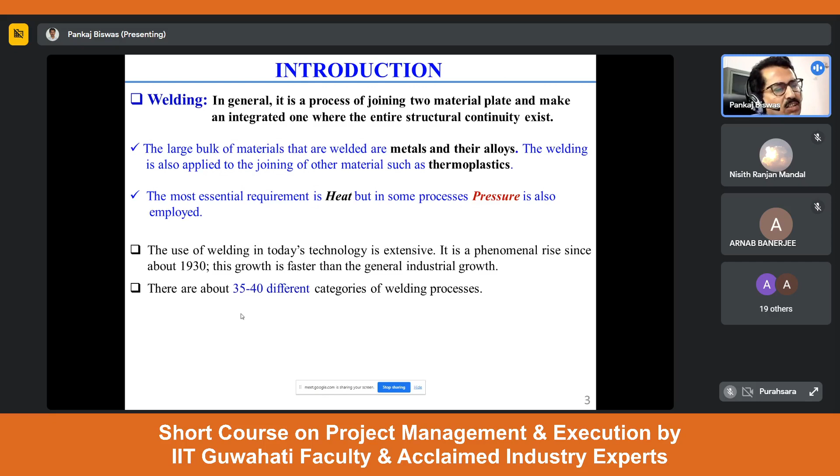After that, I will discuss the rest of the things successively. So, welding management in industry - to achieve the goal of a welding project, generally the following points need to be considered. For proper completion of any project, we should consider that completion should be within allocated time, expenditure should be within the budget, and we should maintain the quality standard.

Welding management is nowadays gaining attention globally, because this welding technology has demand in outsourcing as well as in boosting welding related manufacturing abroad. If there is a lack of management, your welding project limits the innovativeness as well as competitiveness among other industries. That's why proper management of welding related projects is essential.

How it is, I will discuss in today's lecture. First, I will discuss the different aspects required to complete a welding oriented project successively - that fundamental thing first I will discuss. After that, I will discuss a little bit about the management oriented thing.

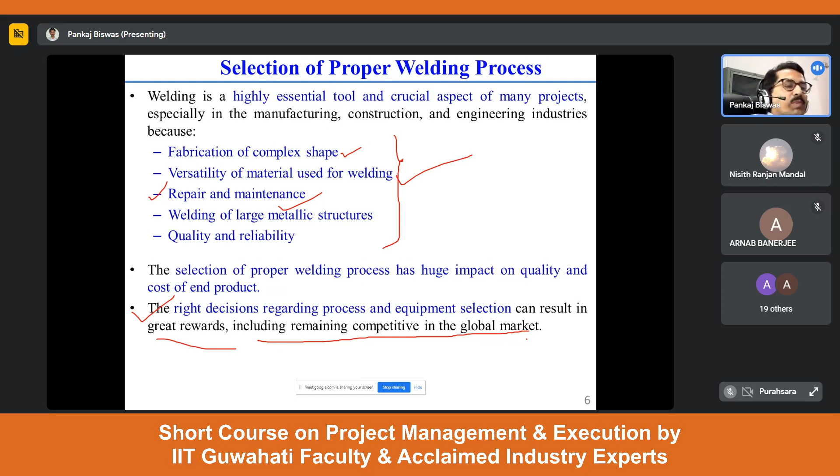So here I am showing, first I'll discuss a little about the different types of welding processes, and what types of welding processes are used for what types of purposes. Welding has different categories. I have already told you about 35-40 different categories of welding process are there.

These welding processes are grouped depending upon how the heat is generated, whether in some welding processes pressure is required or not. This welding is classified depending on its source of heat, it is categorized depending upon its pressure, and it is categorized depending upon its phases of base and filler material - phases meaning whether it is solid state, liquid state, or solid-liquid state.

Depending upon the composition of the joint - whether it is autogeneous, heterogeneous, or homogeneous - welding is also categorized. Depending upon the position, generally the position of the electrode, welding is categorized. And depending upon the mechanism - whether it is automatic, semi-automatic, or manual - welding process is categorized.

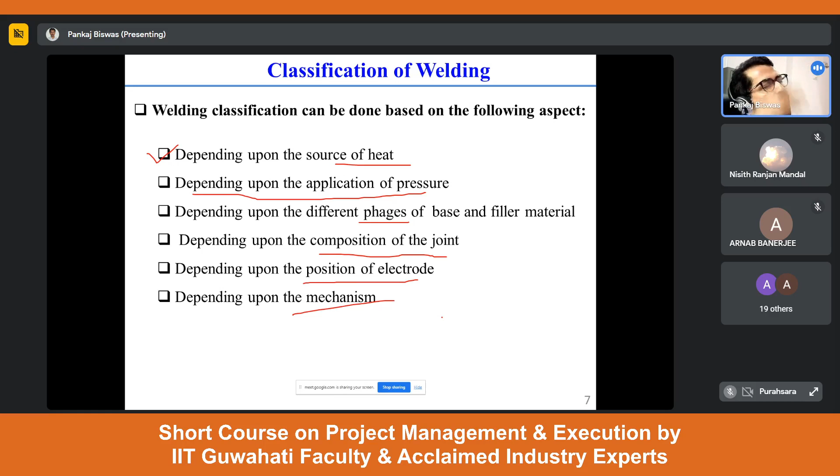Now you should have a detailed idea on this, then you can choose the correct welding process for the correct project. So let me show just one of the categories - this is depending upon the source of heat, how we can categorize the welding process.

Like arc welding process, here the source of heat is welding arc, that means electric arc. So many different categories of welding process are there, like some source of heat in case of welding as gas - so many categories are there. Similarly resistance heating, thermochemical welding processes, mechanical energy welding processes, and some other advanced welding processes generally considered radiant energy welding processes like electron beam, laser beam. These are the different categories of welding process.

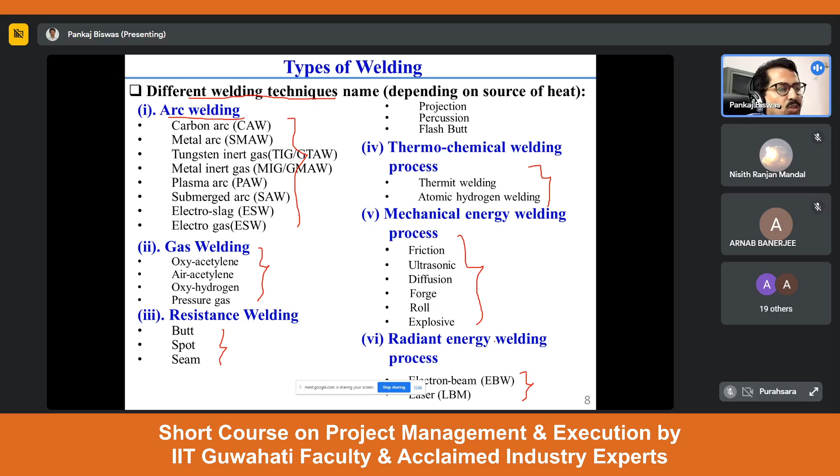Now, for what types of applications you should use what types of welding process, I am just briefing here. I am not going into detail on all these things, because if I discuss all these things it would take, as I've told you, one lecture for each welding technique. So I am just briefing this thing, giving you some fundamental ideas so that you can immediately get an idea of what type of welding process you should use for a particular part.

The selection of a welding process depends on the number of components to be fabricated, what is the capital equipment cost generally considered for that project, what should be the joint location, what is the structural mass, and what is the desired performance of the product. Depending upon these things, you can use your welding technology for a specific type of purpose.

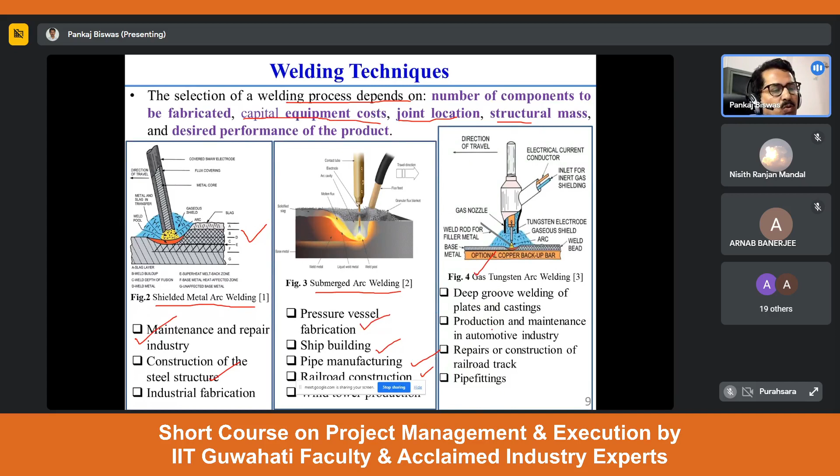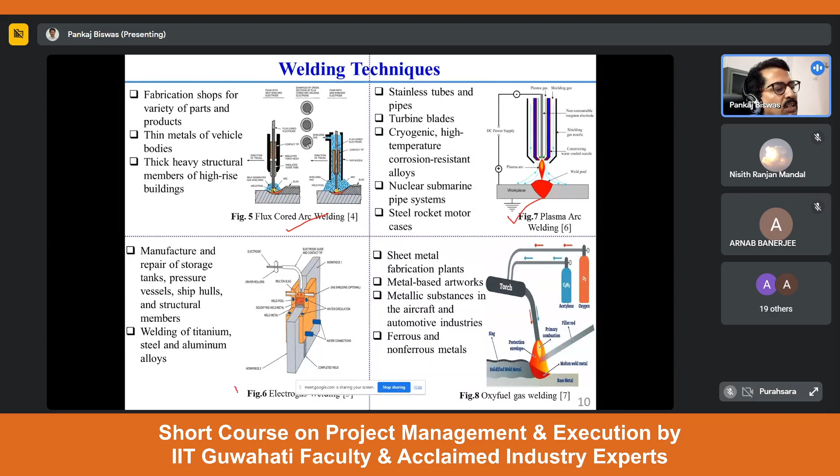Here I have shown the gas tungsten arc welding process. So seeing the quality of work, you can immediately say what should be the welding process for that purpose. I have grouped all these welding processes in that way, like the flux cored arc welding process. Here you see plasma arc welding, electroslag, electrogas, oxyfuel welding process, where you should use all these things.

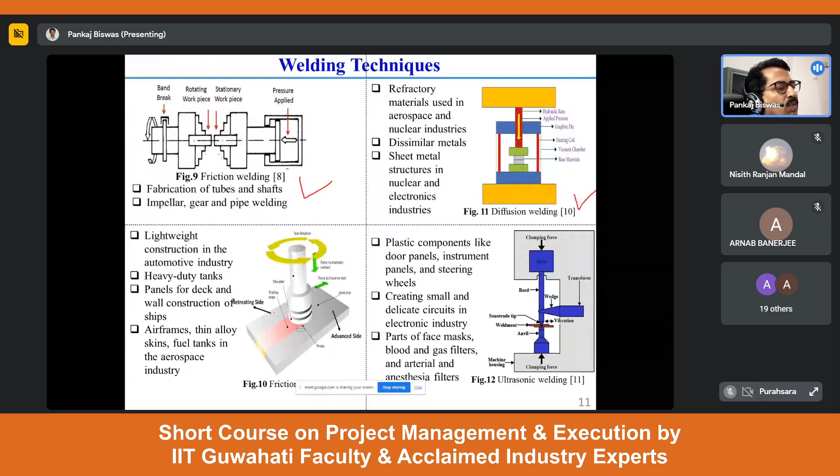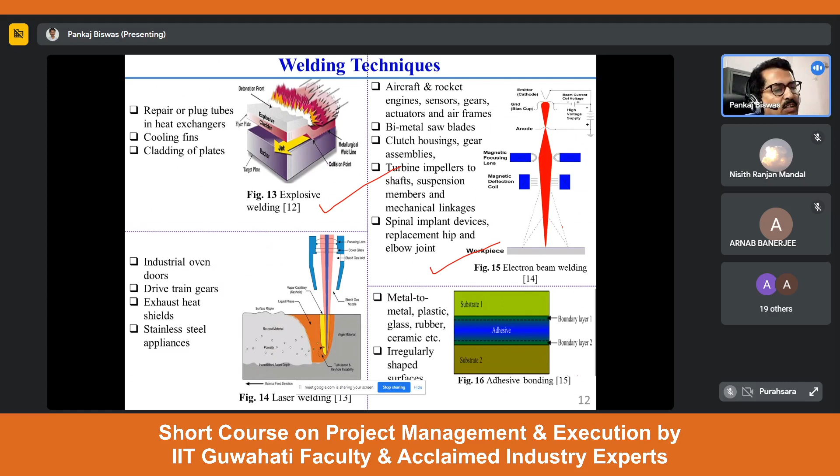Similarly, here you can see friction welding, diffusion welding, friction stir welding, ultrasonic welding, explosive welding, then electron beam and laser beam. So where is its potential application? Beforehand, you can get a very brief idea from this detailing of welding technology selection in appropriate welding projects. Now I am going to discuss some basics of welding joints.

So to handle a welding oriented project, first and foremost you need to know this basic terminology. Because in your welding process or welding drawing sheet, these types of terminology will very frequently come. That's why you should have a very fundamental idea of all this terminology. So I will just give you these fundamental things. After this, the rest of the things I will discuss.

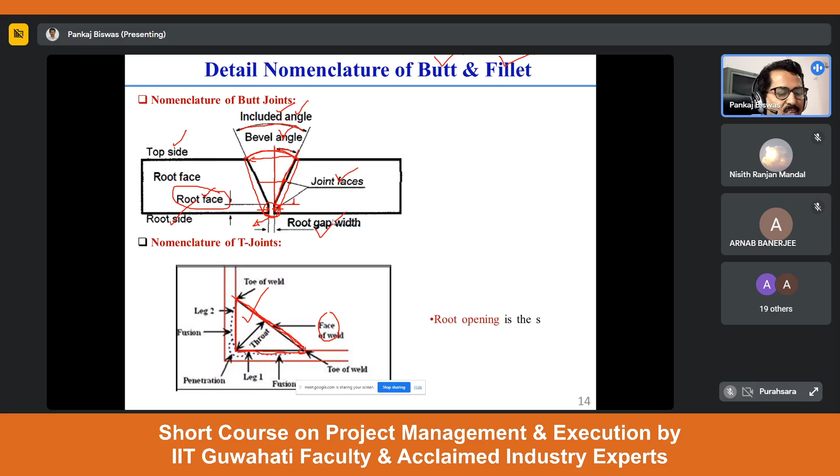So the next slide. There are other things you should also know. I have already told you about the single V butt joint: what is the included angle, what is the bevel angle, what is the root face and all the things. Similarly, for thick sections, where the thickness is higher, like 20 millimeter, 50 millimeter, instead of using V groove weld, if we use J groove or U groove weld, we can get a lot of advantages compared to the V groove weld.

In J groove or U groove there is also some terminology which you should know before discussing the rest. Here you can see that in case of single U butt joint, this is called included angle. This is called root face. But here some extra terms are there. This is called root gap. There is a root radius, and there is a land. From here to the root radius position there is some flat portion, that is called land of this U joint. Here we have not provided this, but these are the things you should know.

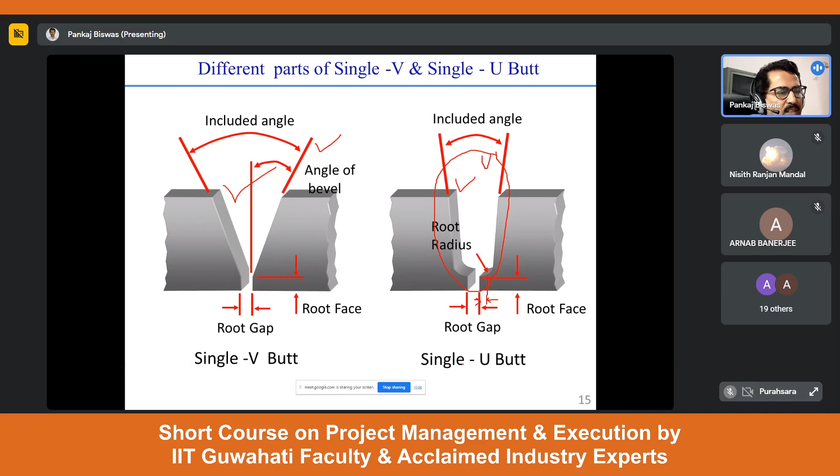Now, I have discussed a little bit about why the double V butt joint or single V butt joint, or double U joint, double V joint is required. Because, as I have already told you, generally once the thickness is on the higher side, we use double bevel, or you can say double V joint. If we use a double V joint, we can get a lot of benefits. We can reduce the weld material drastically, as well as minimize unwanted defects, residual stress and distortion.

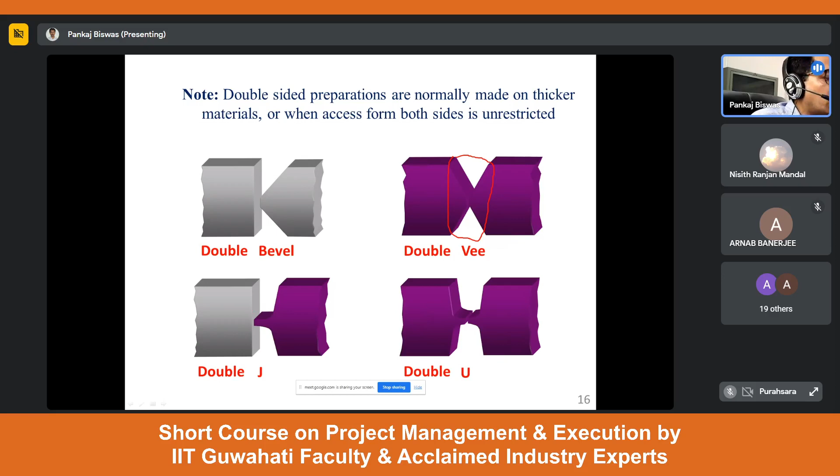But the problem is that some structures are not very easy to invert. In that case, this double V or double bevel type of butt joint is difficult to implement. There we can use U or J groove types of joint. Here double J and double U are also shown. How it is, I am just going to discuss.

So first of all, I am showing a particular thickness of plate. If you use a single V type of joint geometry, whatever weld material is required, if you use a double V butt joint you can reduce that weld material to around half of the single V butt joint. Understand?

If you divide the single V, you can get 4 triangles like this. Whereas in the case of the double V butt joint, for the same thickness, you can do it using 2 triangular sections of filler material. Understand? So here the volume of filler material you can reduce drastically, around 2 times compared to the single V butt joint.

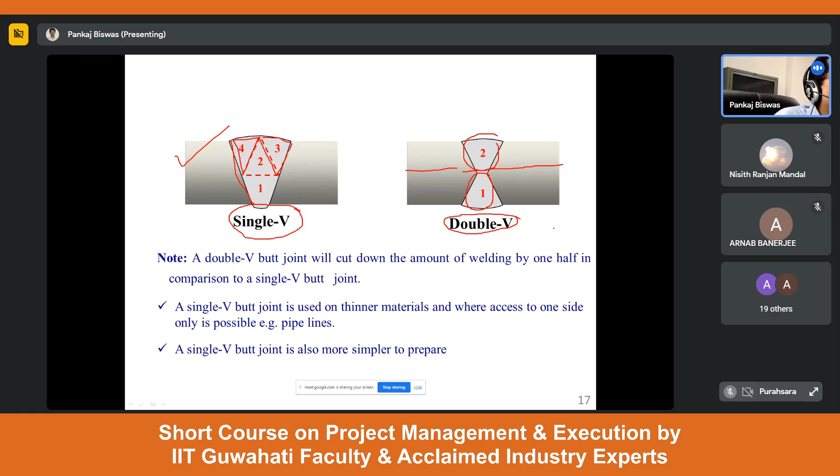But the problem is there should be feasibility of inverting the weld structure, because in some cases you have a very big block of ship structure whose weight will be 100 tons. To invert those types of structure is very difficult. So you should use the double V butt joint where there is a possibility of inverting the welded structure. Understand?

Now, what are the advantages and drawbacks of the U and J groove? As I have already told you, in the case of U and J grooves you can reduce the volume of filler material drastically, because instead of making the edges bevel type or V type, here we make them almost parallel to each other. You can see this. So the volume of filler material is reduced drastically, and its distribution throughout the entire thickness of the plate is almost uniform.

That's why whatever expansion and contraction phenomena take place are also almost uniform in nature. Due to that, the chances of residual stress and deformation are less compared to a single V butt joint. Understand? But there is a disadvantage also, because to make this J groove or U groove, a very costly and time-consuming machining operation is required beforehand.

Apart from this, in these types of welding process, if the thickness is very high, there is a chance of lack of side-wall fusion. Why? Because with this electrode or filler wire, the arc is generally in the perpendicular direction. So at the side wall there is a chance of lack of fusion if the depth of the J or U groove is very high. That's why J and U grooves also have some limit, and sometimes double J or double U grooves are required.

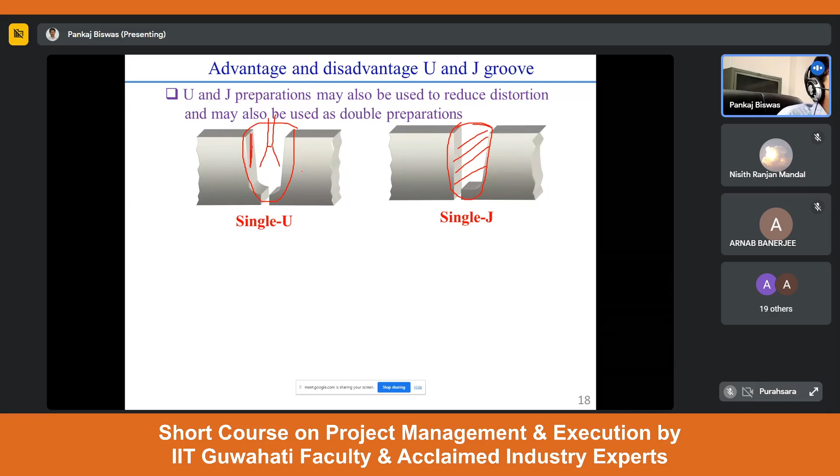So these are the advantages and drawbacks of the J groove or U groove compared to the V groove. What is the drawback here? They require costly and time-consuming machining operations, and there is a chance of lack of side-wall fusion.

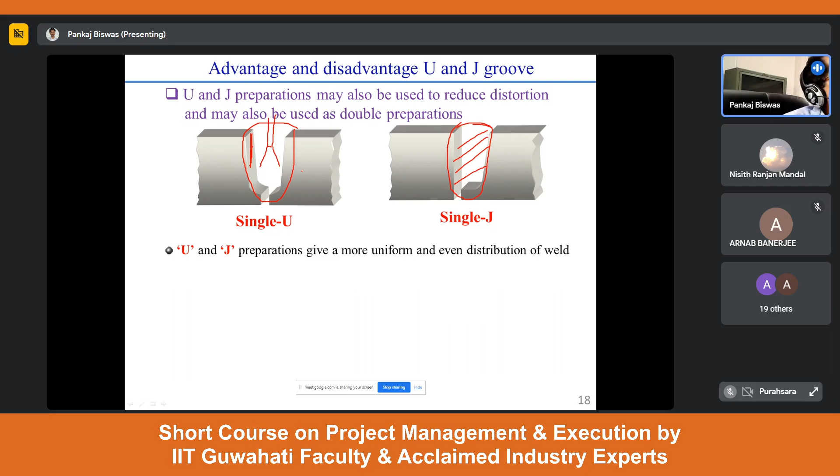But it has a lot of advantages, in the sense that filler material requirement will be less, deformation will be less, and residual stress and other things also will be less. Now I am going to discuss some other fundamental things, because these terminologies will come up in project management and so on. That's why I'm telling you.

Like, what is a backing strip and a backing bar? When we do welding, to support the filler material, it should not pass through the bottom side of the workpiece material. Generally we provide some backing support. This backing support has different names: one is called backing strip, another one is called backing bar. So this is a backing bar or backing strip.

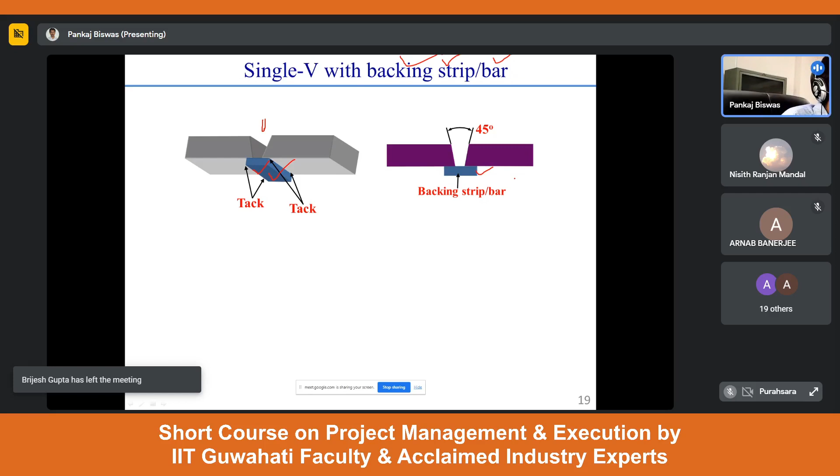I am telling you a little about what a backing strip and a backing bar are, because we use these in different types of welding drawings. Generally the backing strip becomes an integrated part after welding. That means you need not remove this extra supporting part after welding. But the backing bar is generally recyclable, meaning you can remove it and reuse it for other purposes. For submerged arc welding, we very frequently use the backing bar. So you should know these things.

To overcome this, we can use a process called transitioning. What is transitioning? Transitioning means we make the thicker plate section into a taper shape. This taper shape should be such that it does not affect the fatigue life of the structure or its stress concentration. So what is this transitioning? I am discussing it a little here.

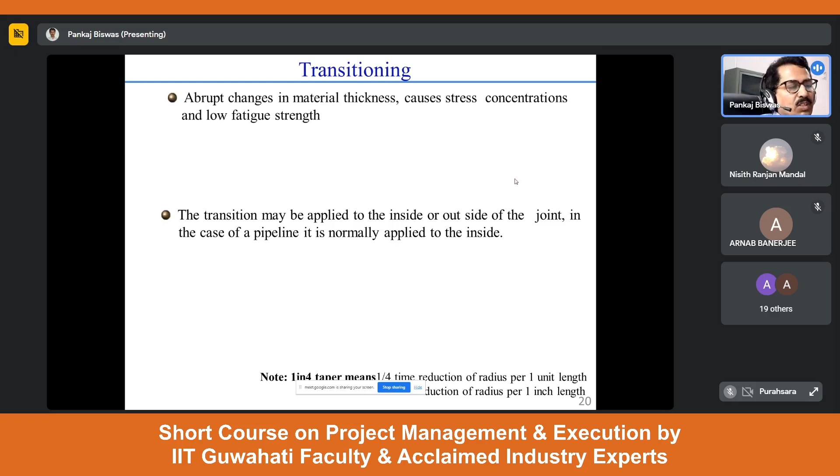Here you see this is a thin plate and this is a thick plate. We want to join this thin plate with this thick plate, correct? If you just directly put the weld here, you can see there is an abrupt change, at the corner point of this weld. So here there is a chance of huge stress concentration. To eliminate this stress concentration effect, we can use the transitioning technique. In the transitioning technique, we make a taper on this thicker section.

What should this tapering length be, so that the stress concentration will be less and it will not hamper the fatigue life of the structure? That is called transitioning. We want to reduce this high-thickness plate by a thickness, let's say T. So from where should the tapering start so that stress concentration will be less? The length L should be a minimum of 4T, four times this T.

Understand? That means we should start our tapering from such a position. If this L is equal to or more than 4T, then in this welding position the stress concentration will not affect the fatigue life drastically. This is a very important term which we very frequently use in industry. It is called transitioning, and it also has a name: the 1 in 4 taper. We generally need to use this 1 in 4 taper for different plate thicknesses.

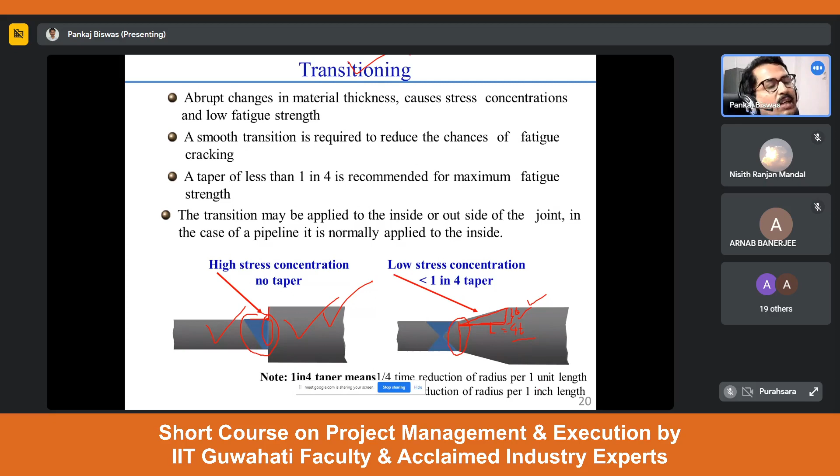That means to reduce a particular thickness, what should be the length for the start of the taper, that you should know. Okay. Now I am going to discuss a little bit about the generalized welding symbol. After that, I will discuss the rest of the part.

You see, this is a very big topic. It is very difficult to cover within a single lecture, but I will try to cover it very briefly. So you see, to be familiar with welding oriented drawing, what are the first and foremost things you should know? The first and foremost thing we should know is this generalized welding symbol,

because generally in a welding structure oriented drawing, you will get these types of lines and some wording. Seeing these words and lines, you should know what things are required to do for that welding project. That's why this generalized welding symbol is a very important part in project management related things. Because if you don't have an idea of this generalized welding symbol, you'll not be able to understand the welding drawings we generally use in industry.

That means by this simple generalized line, we can represent what should be the welding process, what should be the welding type, what should be its specification, and all the things in detail. Understand? So this is a generalized welding symbol. This horizontal line has a name, that is called the reference line. And this is called the tail of the generalized weld symbol.

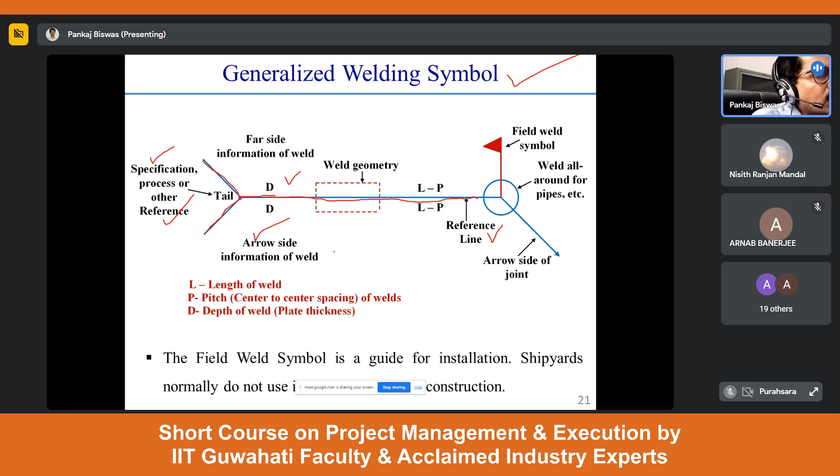In this tail, the different types of specifications and references we use are provided. And this reference line has a top side and a bottom side. The top side of the reference line is called far side detail, and the bottom side of the reference line is called arrow side detail. How it works, I will discuss a little by giving some example. Let us say this is a fillet weld you need to do.

So here your fillet weld should be on this side. If you use a welding symbol on this side, then what should the welding symbol be? A little bit I am just telling. Here the arrow side means the side on which we are providing the arrow. We are providing the arrow on the right side, but I have already told you this horizontal line is called the reference line.

Whatever is below this line will be the details of the arrow side, and whatever we provide above the reference line will be related to the other side. Understand? So here I provide the arrow on the side where welding is not required. This is the reference line. On the arrow side I have not provided any welding symbol, but on the other side, or far side, a fillet weld is required. That's why I have provided the fillet weld here.

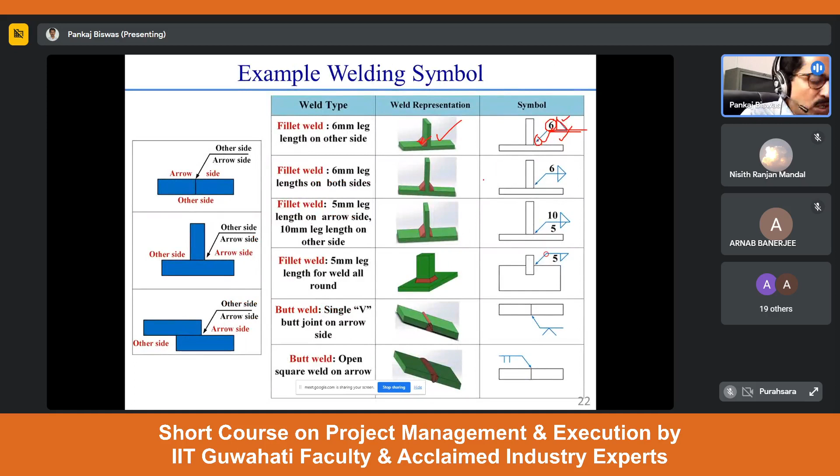Now let's say this fillet weld has a leg length of 6 millimeter. This 6 millimeter is generally put on the left side of the symbol. So in the generalized weld symbol, I have provided the detail of this information here. Okay. Here you can get the detailed idea about all these things. I am not going into the details of all these things. These are the different symbols we use

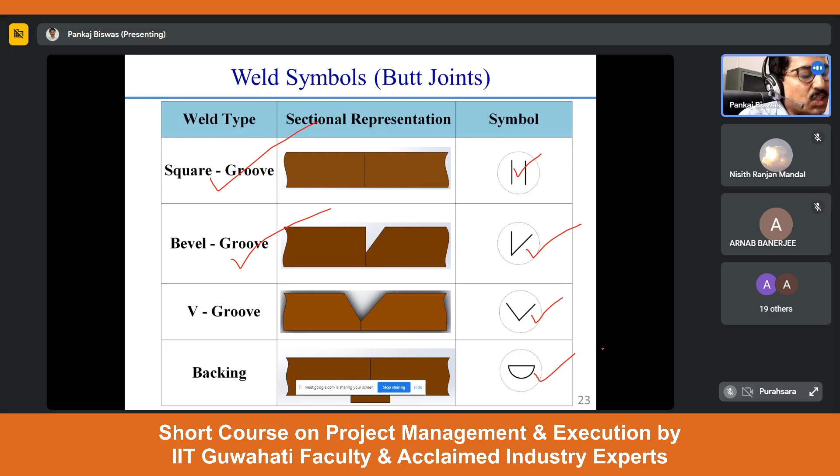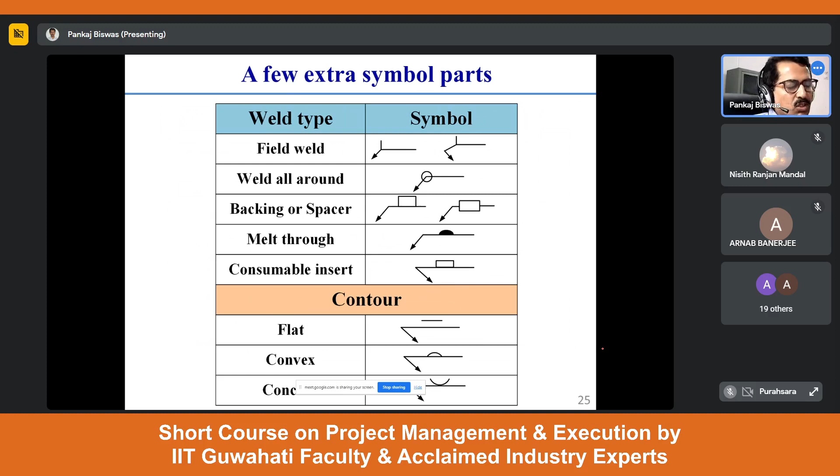in welding drawing. For a square groove, we use two parallel lines. Similarly for a bevel groove, a bevel shape. Then V groove, V shape. If backing is required, then the backing shape is like this. These are different types of examples I am showing here. Some other information related to welding symbols is also given, which you can see from this lecture slide, because it will be provided after this lecture. You can get the detailed idea about all these things.

Second operation will be further away from this first operation. Third operation will be further away from this. If there are some other operations, the fourth operation will be here. What I'm telling, understand? So always you should keep it in mind.

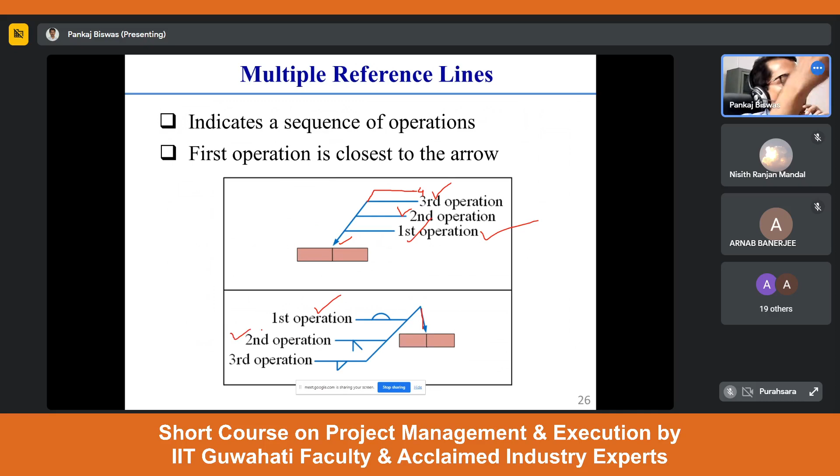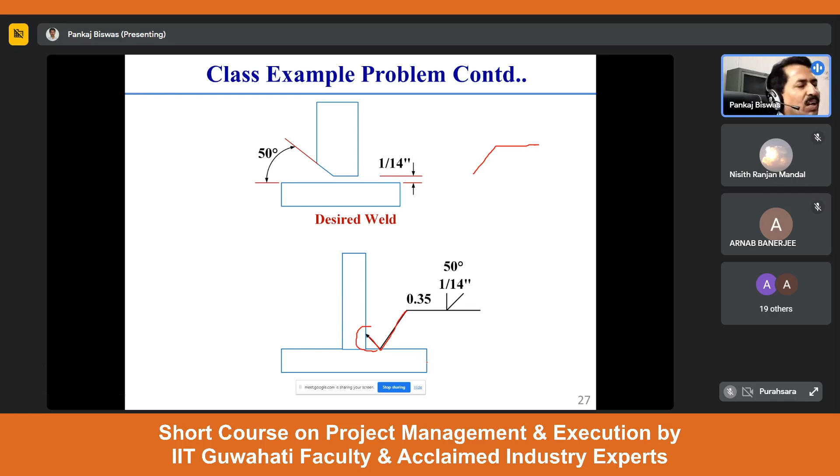So these are related to welding symbol. Okay, now weld quality, here you see.

Generally, quality of weld includes design consideration. A weld quality is highly dependent on its design consideration. What are those design considerations that we should know? To get a desired quality, generally the following criteria are required. The first criteria we should consider is design consideration, which includes so many different aspects. Similarly, there should be some fabrication consideration, inspection consideration, and operation and maintenance consideration. To get a desired quality welding, generally these are the criteria we should follow.

Now what does this welding quality mean? Welding quality means it has a good quality. What is bad quality welding? Good quality means where the number of defects is less. If the quality is bad, there is a chance the number of defects is more. How this happens, I'll discuss in the subsequent slide.

So specifying a very good quality or excessive quality of welding is not a good criteria, or specifying a very bad quality welding or low quality welding also is not a good criteria. That's why to get a good quality or optimum quality welding, there should be proper consideration of the following aspects. What I am telling, understand?

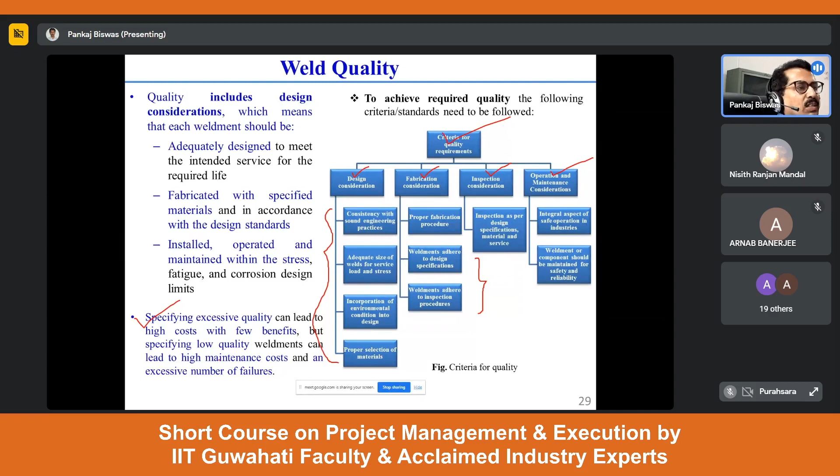So how this quality of a welding can generally be inspected or tested, that related thing I am just going to discuss. Now you see, the weld quality is generally affected mainly by the discontinuity present in the weld. What are those different discontinuities?

Here you see, in welding defects, generally what is called a defect? Defect means once a welding has some particular defects, it generally goes till its what is called defective weld means it goes to its failure limits. Generally, in case of welding quality measurement, we measure the flaws of the welding.

Flaws means that is also a discontinuity, but which does not go to its failure limit, that means which is in the acceptable limit. What I am telling, understand? So that's why instead of using the term defect directly, here I have used a term that is called discontinuity.

So in fusion welding, there are different types of discontinuity which can arise. These are generally process-oriented discontinuity. There can be metallurgical discontinuity, there can be design discontinuities. In the case of solid state welding process also, there are different types of similar discontinuities, but of a little different type. What I am telling, understand?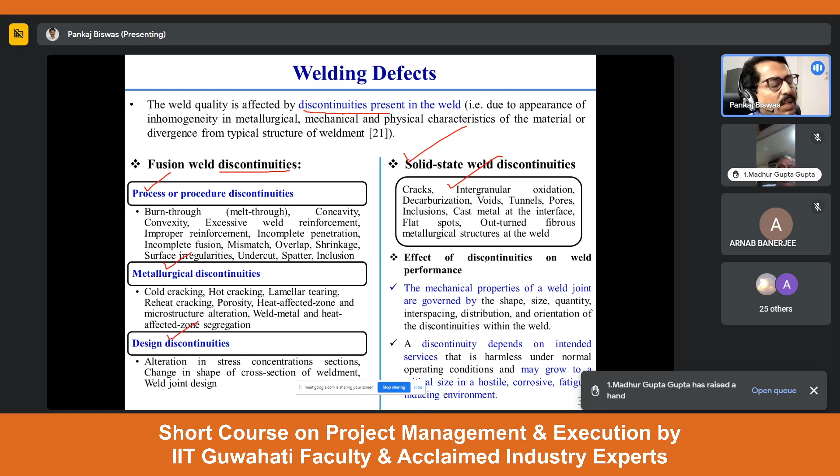Now these defects have a tremendous effect on this quality. So to predict this defect, generally what are the different things we use?

Different things we use are generally called welding inspection and testing of welding. So what are the different types of welding testing methods and welding inspection we use? I will discuss this a little bit, and after that I will discuss quality assurance and related things, because time is very less.

So what is inspection and testing? Testing generally is done following a specific standard in some certified laboratory. Whereas inspection typically takes place at an industry where the products are made, involving checking a random sample of an order for compliance with buyer requirements and specifications.

Now what is the requirement of this inspection? Generally, to assess the property and quality of the welded joint, and whether this welding is suitable for that particular object or not. That also we can predict by this inspection and testing procedure.

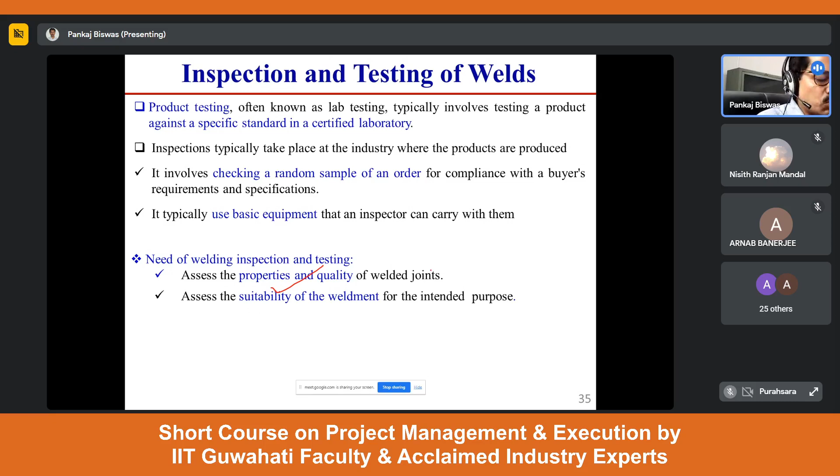In case of welding inspection, this is not only done before welding or during welding. Throughout the entire service life of the welding, whatever quality control activities we carry out generally consist of a series of welding inspection related activities.

This welding inspection is not done by a general person. It is done by qualified and especially trained personnel who must have working knowledge of applicable codes and standards. Only by them can we inspect this weld quality, and such an inspector should have a certificate from a well-known certification society.

Some certification society names I have shown here, which generally provide certificates for welding inspectors, like American Welding Society, CSA (Canadian Standard Association), ANSI, AWS. These are the different types of societies that exist. From there you can get an inspection certificate by cracking some qualifying exam.

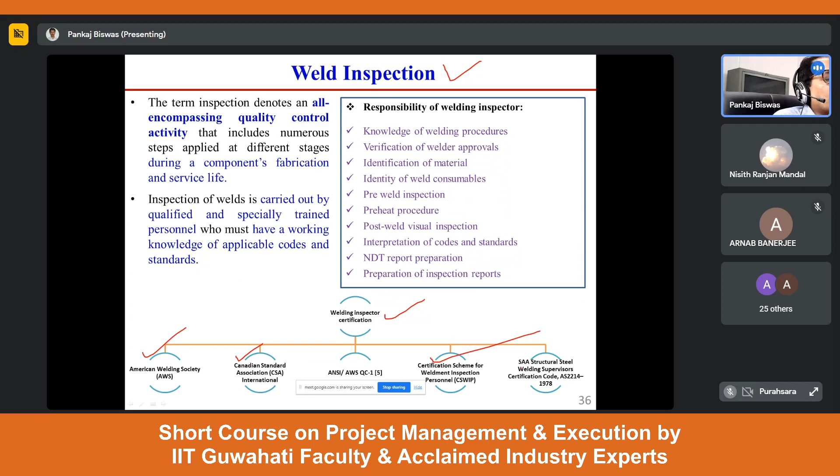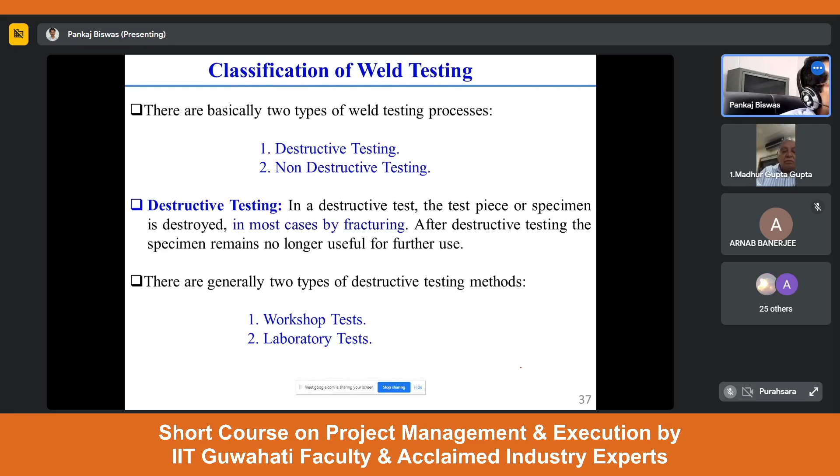What are the different classifications of welding testing? There are different types of classification: destructive, non-destructive, NDT testing. This testing can be workshop testing or laboratory type testing. There are different names for all these, and I will provide all the details.

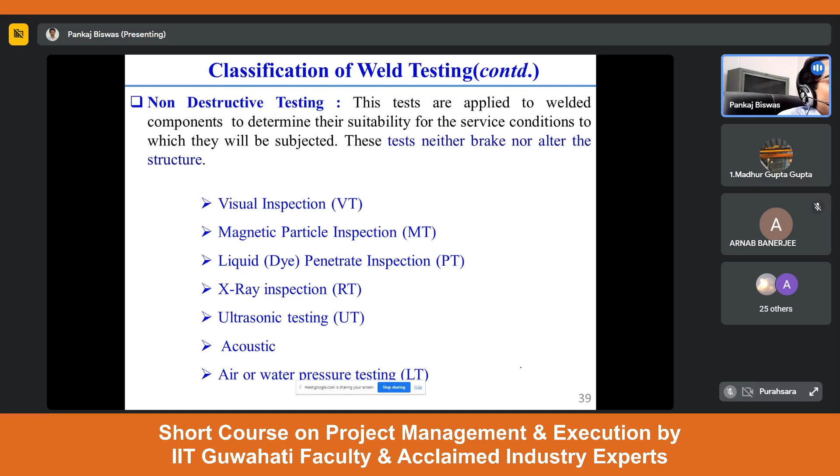What are the different types of testing? This is NDT testing: visual testing, magnetic particle testing, dye penetrant testing, radiographic testing, ultrasonic testing, acoustic technique, and water pressure testing.

What are the different aspects an inspector checks to assure the quality of welding? I have pointed out a little bit, like inspection prior to welding. To get a quality product, first and foremost we should follow these different steps, like inspection prior to welding, doing different types of inspection of welding related samples.

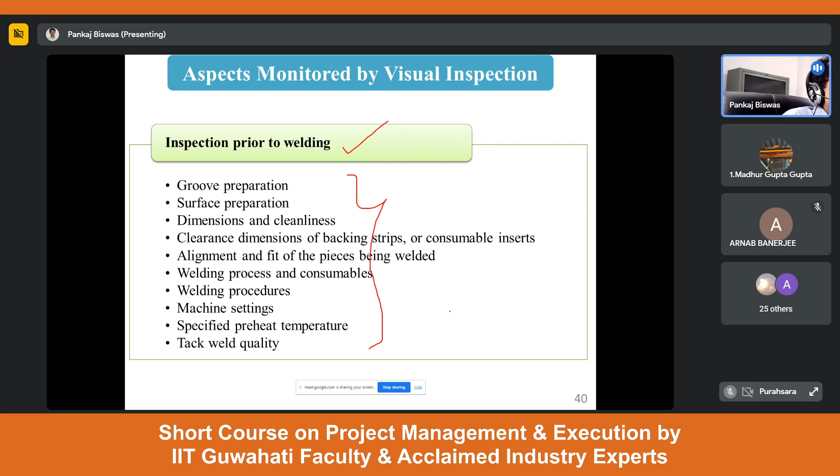Inspection performed during welding - what are the different types of inspection required? That I have also provided here. What are the post-welding inspections? That you can also see. This means if your welding quality is not good, what should be the next step to make it applicable for service life - that related information I have provided here, you can go through this.

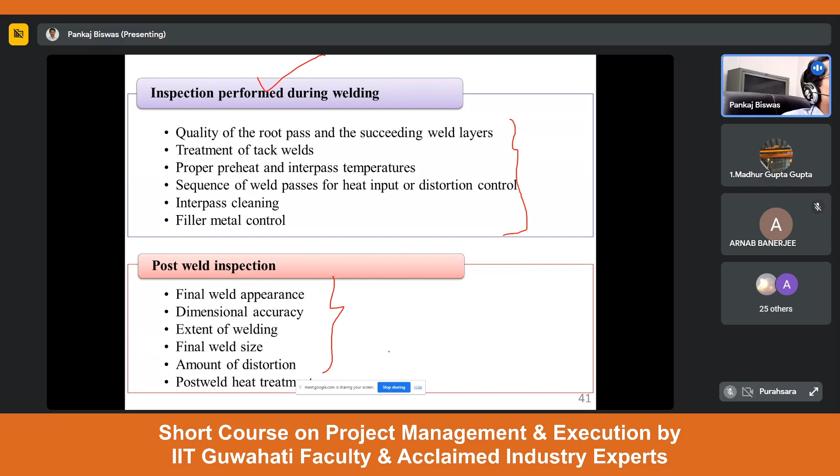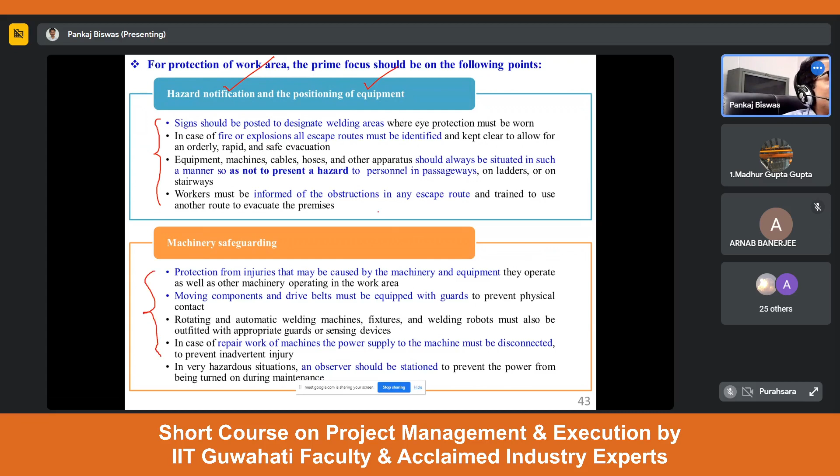In case of machinery safeguard, what are the different safety aspects we should follow? That is written here. What are the protective booths where welding is done, and how we can protect from radiation and other things? Everything is written here. Then wall reflectivity - where we are doing the welding, what should be the wall characteristics so that it should not affect the general person.

What I'm telling, understand? Your reflectivity or ultraviolet reflectivity should be as less as possible, like this. If your welding related machineries are exhibited for public exhibition or demonstration purpose, what are the different types of safety measures required?

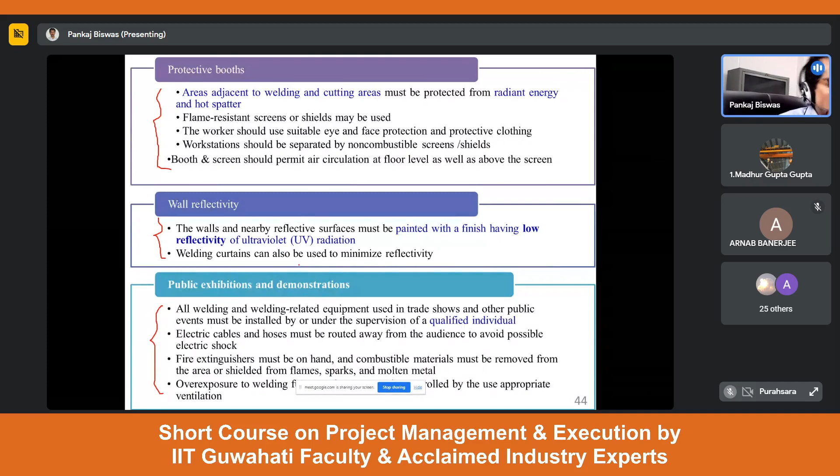Everything I have written here. This is, you can say, a safeguarding device which we use while doing welding. What I'm telling, understand? So the details I have provided here.

Now I am going to discuss a little bit about quality assurance. What does it mean? Within another 5 minutes I will complete these things. In quality assurance, in welding it involves implementation of procedures and processes which generally ensure that the welding process and its result meet the requirements, standard and specification. So that thing is generally assured by this quality assurance procedure or activity.

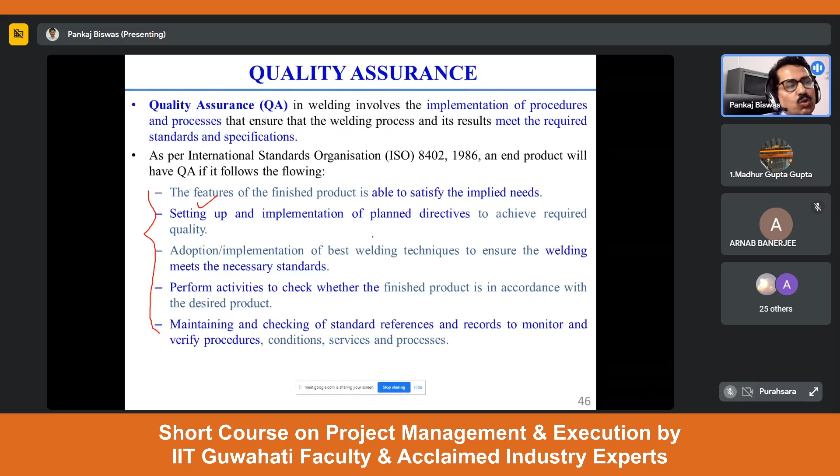As per ISO standard, you can see what are the different things we should follow to get a quality assured product. I have written 5 different points. The first point is that a product should be quality assured if it follows the features of the finished product, that is, if the finished product is able to satisfy the implied need. To get a quality assured product, generally setting up and implementation of a planned directive is required to achieve that required quality. Some points I have written there. Once you go through this, you can get an idea about quality assurance in welding.

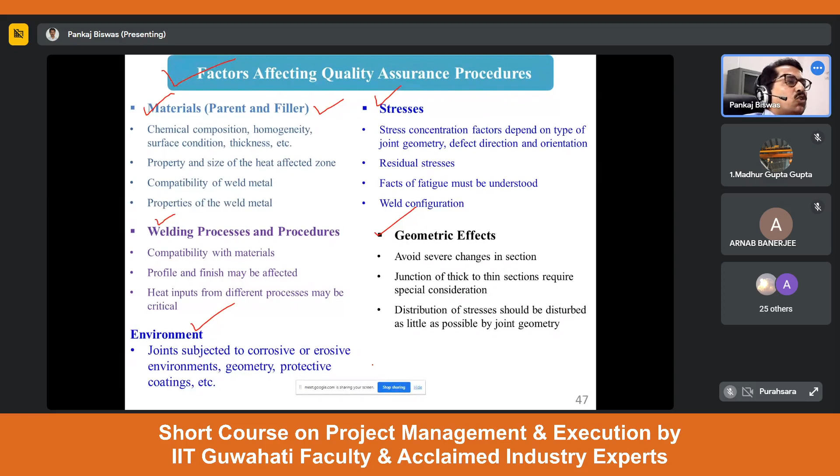What I'm telling, understand? There are different factors which affect this quality assurance procedure. What are those different factors? I have summarized them in detail here. You can see the quality of a product is generally affected by the material, by stress, by welding process and procedure, geometric effect, and environmental effect. These are the things I have written in brief, point wise, so I am not reading all of them. But once you consider these factors during your quality assurance procedure, your final product will satisfy the required service and quality.

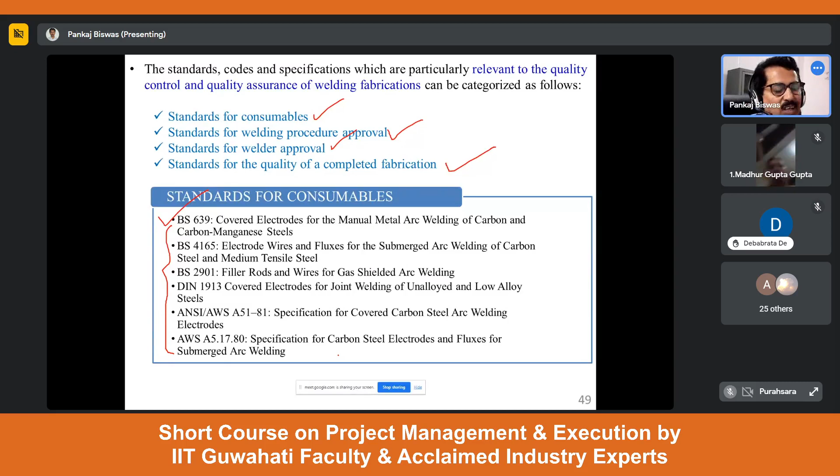So whatever standard is provided there, we should follow those things. After that we should do the welding operation. What I'm telling, understand? So different types of standards for different purposes are given. So we should follow all this specification during a welding project, then only your final thing will be acceptable to the classification society or the approval authority, you can say.

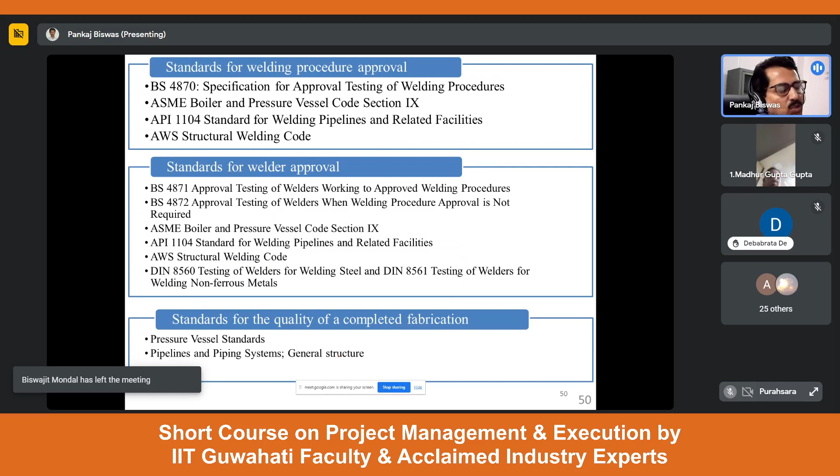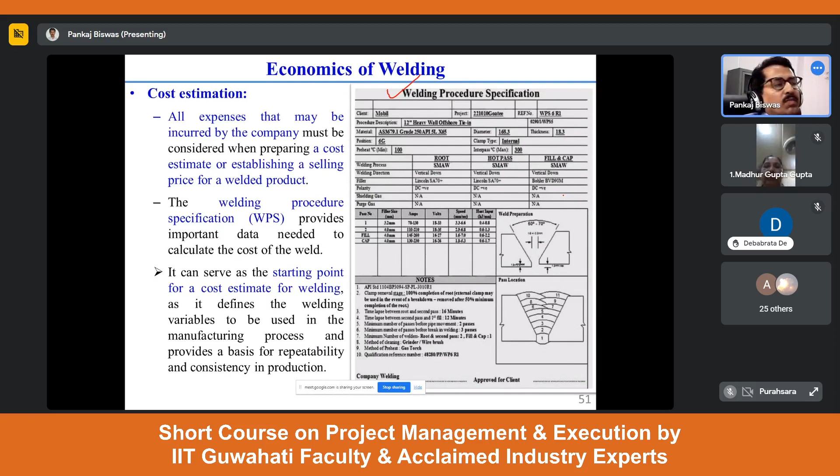Now, in welding, generally how is the cost estimation done? For cost estimation, the primary thing, you can say, is the WPS sample. You can consider this a primary sample for cost estimation of welding. You should know this name, WPS, because it provides the detailed variables required in a welding operation. You have the detailed specification, materials and all the things you can get from this WPS specification. Based on this specification, generally you need to find out the economics of welding, like what are the different factors affecting the cost estimation.

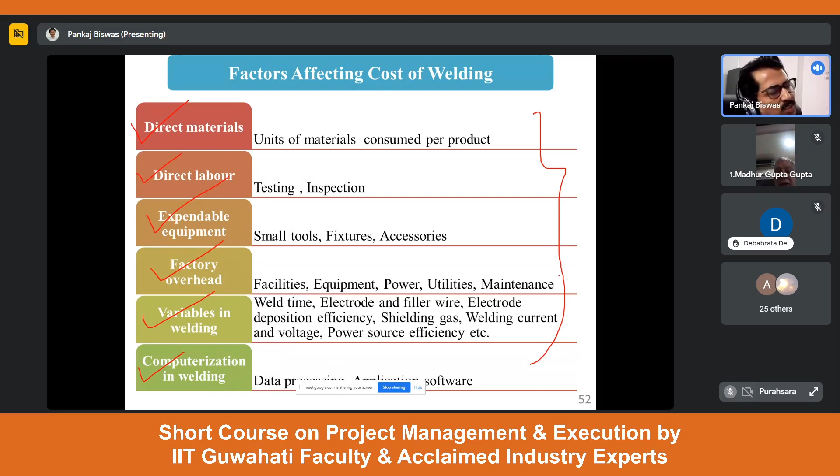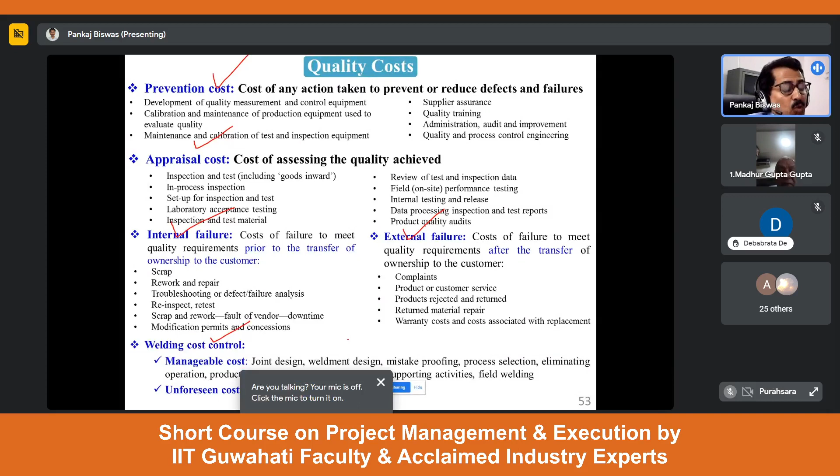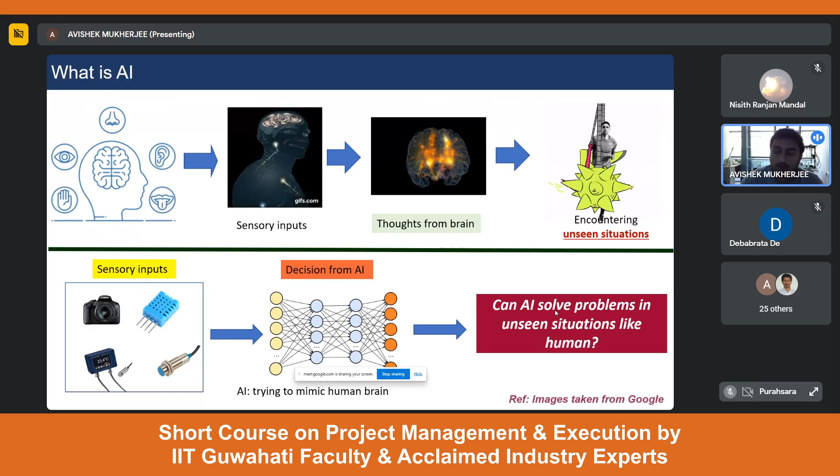But the question is, can AI solve unseen situations like a human being? The answer is no, because AI is mostly supervised. For training of AI, we need so much data. It is mostly data centric. But we humans, if we see an image, we can recognize similar types of images very quickly with a very small number of inputs. That's why a new term is coming up nowadays, that is cognitive intelligence. But anyhow, today's AI is very useful to meet the requirements of industries. So that I will discuss.

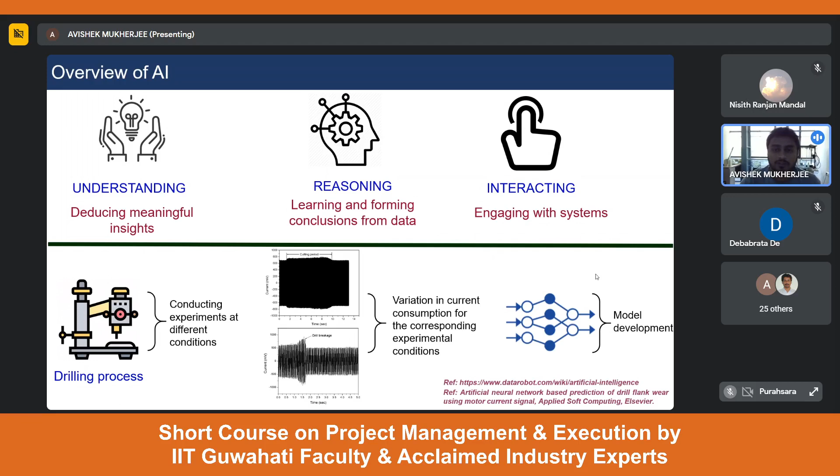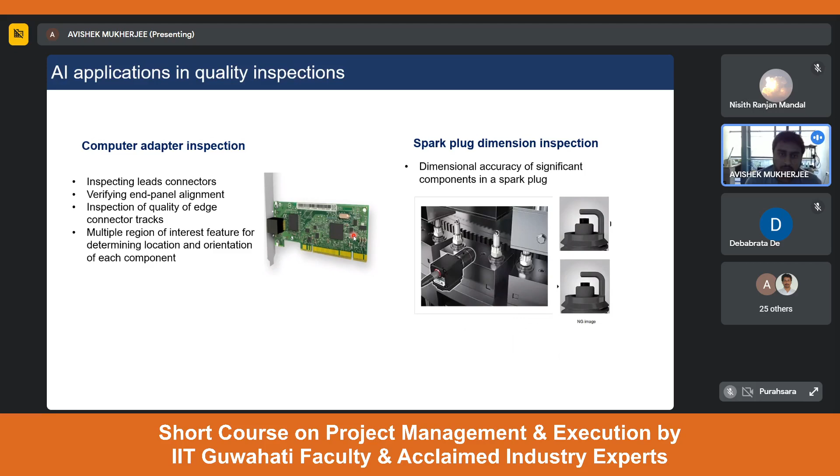Yeah, as you can see, this gap has some standard. If it is more than that, it is a no-go image, meaning this spark plug can be rejected. Otherwise, if it is within the tolerance zone, it is accepted. A camera can be placed, taking the image, and it can be analyzed what the distance is. Based on that, it can be rejected or accepted. So these kinds of applications are there.

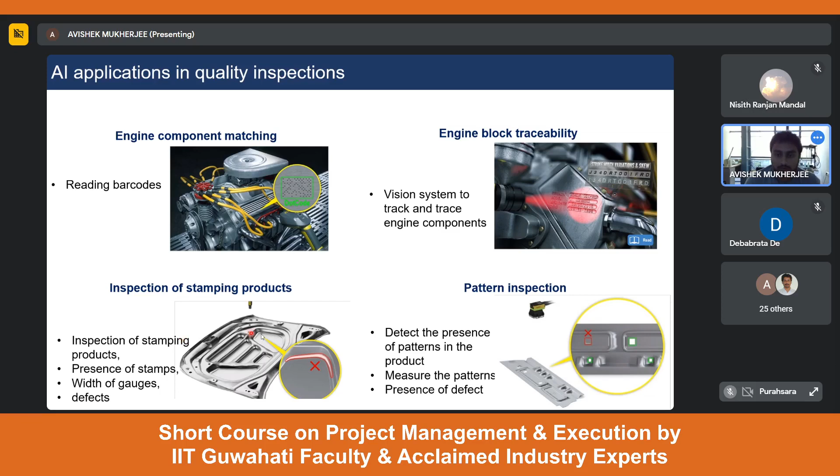Nowadays, workers are doing it with limit gauges, and those are time consuming. Machine vision can do the tasks very easily. Then why should we not go for automation? And then pattern inspection. These are some applications of AI in quality inspection.

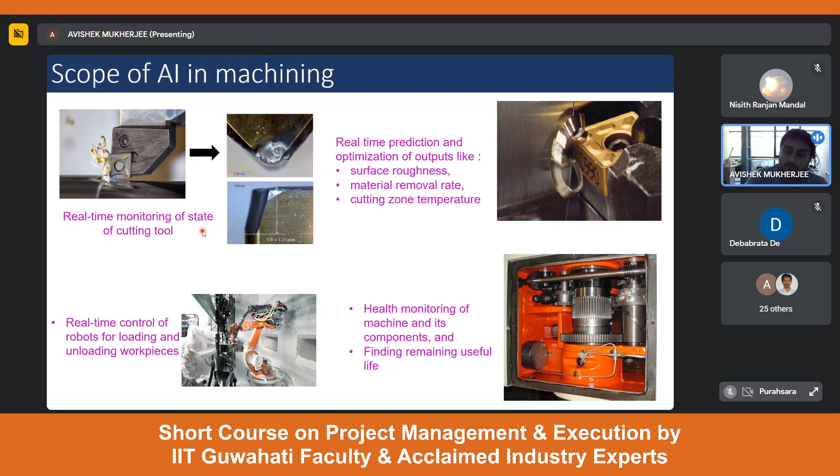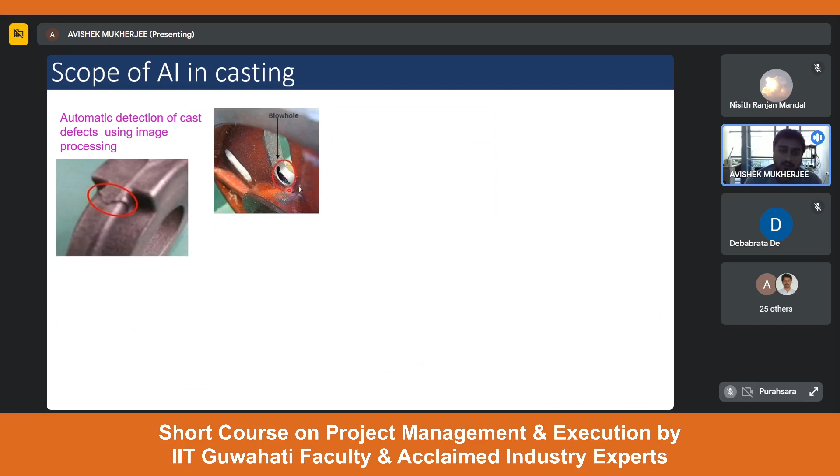Similarly, in casting, you can see that blow holes and other defects are present on the cast. You can take a webcam, take the image, and feed it to AI, and it can tell you which defects are present. Similarly, allowances in the molds can be inspected using AI. Gauges are used manually, and those are time consuming, so AI can save a lot of time.

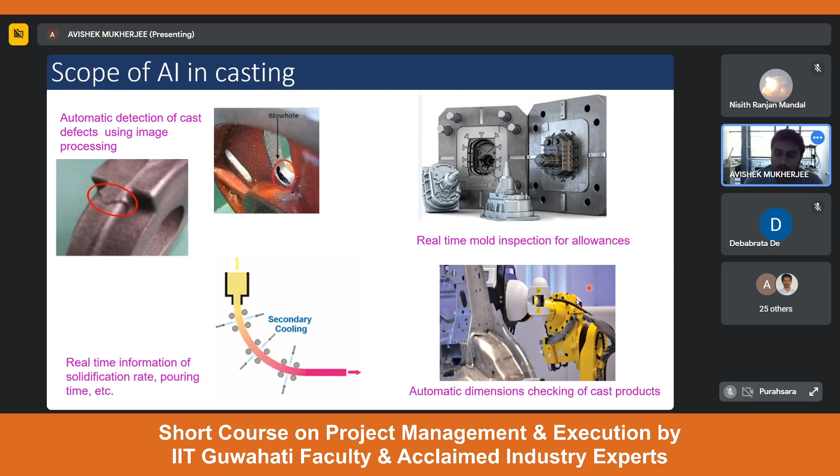Similarly, real-time information like what solidification rate is going on. I have seen this in the IISCO steel plant. They told us they are facing this problem, that they cannot control the solidification rate and pouring time. This can be done using AI. So this is one industrial problem. And also robots are there, so we can control the robots with AI.

Similarly, scopes of AI in forming. So form, tool, and die: what are the defects occurring with those? What is the health remaining? So those are problems of scope of AI in forming.

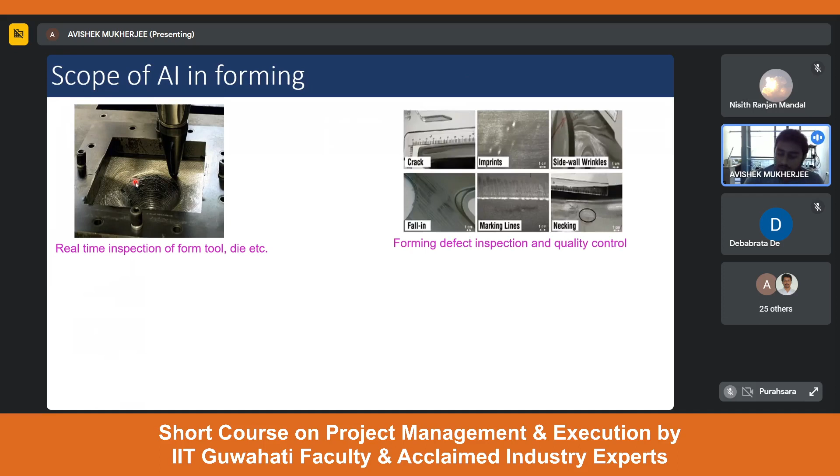Similarly, we can inspect defects in forming also using AI or machine vision. We can monitor temperature. We can make a decision, using the temperature curve and AI, about the quality of the forming going on. And similarly, robots can be used. So controlling robots for forming is also a scope of AI.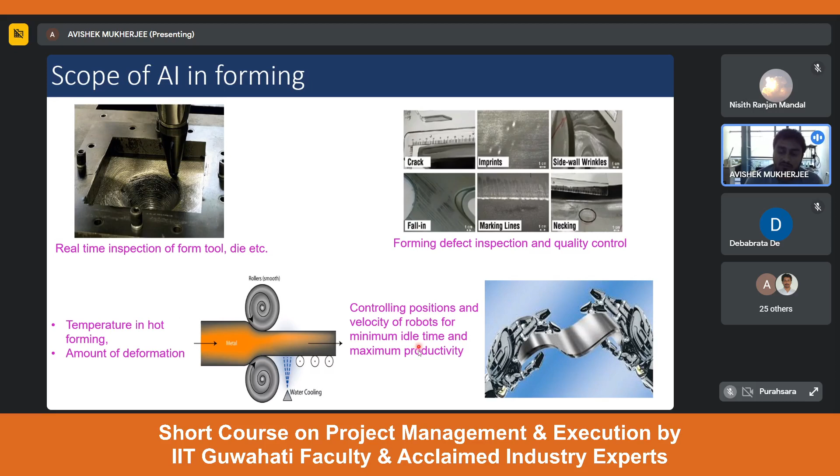Similarly, in additive manufacturing: AI is a new thing, and additive manufacturing is also a very booming area. So we can automate the 3D printing workflow and control the sequence of printing. It is a very large structure, and there are so many parts. So how can we control the sequence? Tool scheduling can be done using AI to reduce the downtime.

Similarly, from a pre-designed prototype, what can be the strength of a product, and whether we need to change the design or not accordingly, we can predict using AI, and we can get an optimized quality product. Similarly, we can optimize the manufacturing variables of additive manufacturing, like acceleration, position, those things. And similarly, defect analysis before printing: if I go for these parameters, whether these defects will occur or not, we can do this using AI.

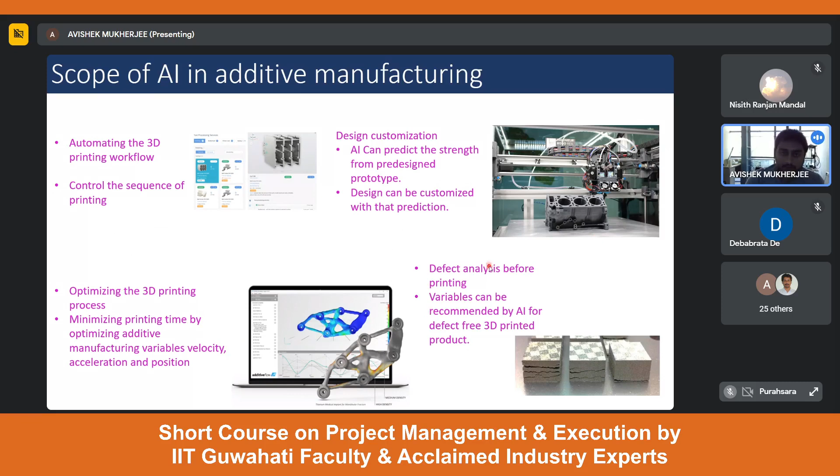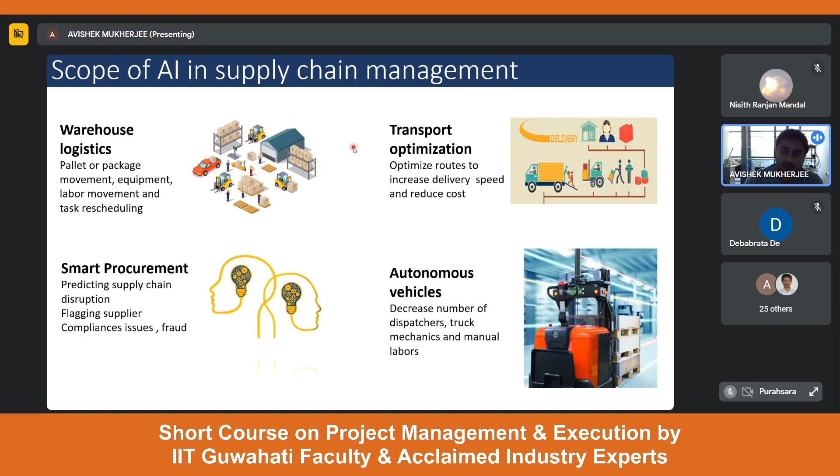Supply chain management: we can do warehouse logistics like packaging, movement. AI is already, I think, well established here, but some industries are not using it. But this technology is mature: warehouse logistics, transport optimization, smart procurement, and autonomous vehicles are some specific applications of AI where we are putting intelligence into several use cases in supply chain management.

Now coming to where we stand today. As I have shown, AI can recognize any kind of object, and this property can be used for various types of defect detection, material handling using robots, and all these things. Similarly, as I have told, wherever faulty products or faulty machines are there, you can put sensors, take data, and predict the machine health.

Similarly, optimizations can be done using AI, so that we can get an optimum quality of the product. It can be welding, it can be machining or anything. Similarly, tool path optimization for additive manufacturing, for robots, for machining, CNC, all this can be done at present. These are all mature technologies.

But what we are yet to achieve: collaborative robots are there, but in manufacturing it is not mature, because there are so many obstacles here and there, and a very uncertain environment, so it needs to be more intelligent. AI needs to be more mature to be integrated with collaborative robots.

Self-learning machines. I have told already that tool condition monitoring cannot be implemented in industries right now, because they are not self-learning. If I change the machine, it needs to learn again. So AI needs to learn automatically from the data, so that it can be implemented anywhere.

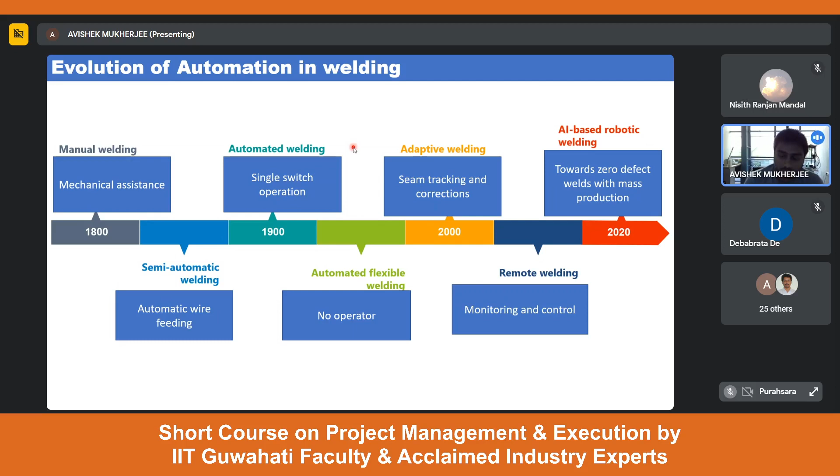As you can see, in manual welding, blow pipe, welding gun, electrode holder, these are the prime components. This is time consuming, one by one you have to do, and continuous welding is not possible. So then comes semi-automatic welding. In semi-automatic welding, people are thinking to semi-automate the electrode feeder. As in MIG welding, there are two rollers continuously feeding a wire. But a person has to press a switch through which the wire is continuously fed. So a highly skilled welder is needed for this semi-automatic welding.

Let me tell you one thing, these images are taken from our recent publication, a critical review on application of artificial intelligence in manufacturing. So all the evolutions and critical review of the application of AI have been taken from there.

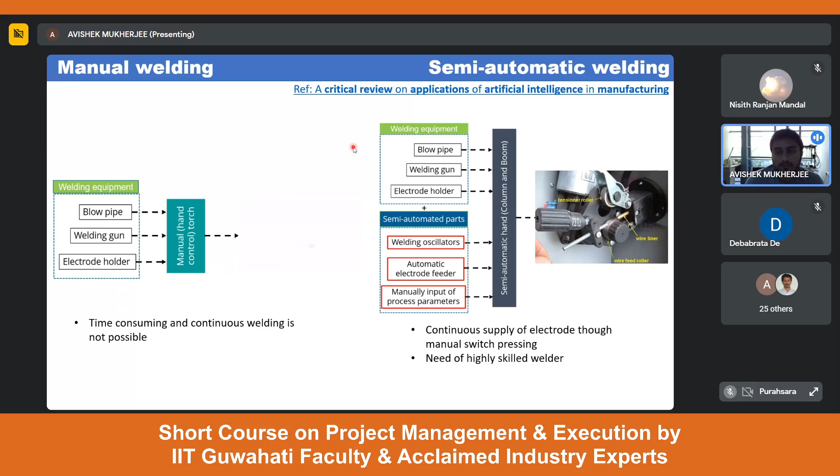So after that, automatic welding is coming, where people are using numerical control for positioning the weld torch and all, but up to this, the weld quality has been checked by the operator itself, whether the given parameters are performing well or not.

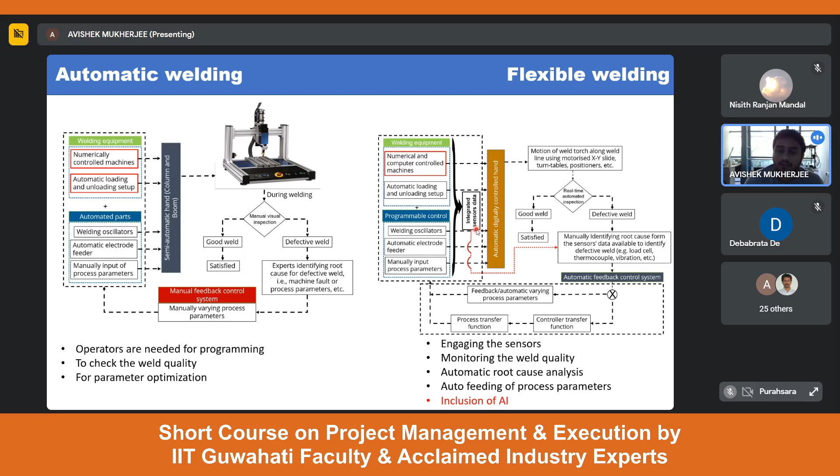But after that, flexible welding has come up, where inclusion of AI has happened. What is AI doing basically? As I've told, sensors and data are a must. So here the sensors have been integrated, like power sensor, voltage sensor, and then vibration sensor, force sensor, torque sensor. This data has been taken and fed to AI. Then AI will predict maybe the UTS value of a weld to give you a proper picture of whether the given parameter is giving you a good quality weld or not.

Coming to adaptive welding, seam tracking is a part of this. In a numerical control machine you are giving it the seam, but whether it is following correctly or not, is there any deviation or not, you have to first detect the seam, you have to make the track. So here machine vision or computer vision is used.

Coming to remote welding, now people are thinking to control the welding from far away from the machine. So they are using cloud computing and IoT based communications to give feedback to the machine and take the parameter or health data from the machine itself. So these are the evolution of welding.

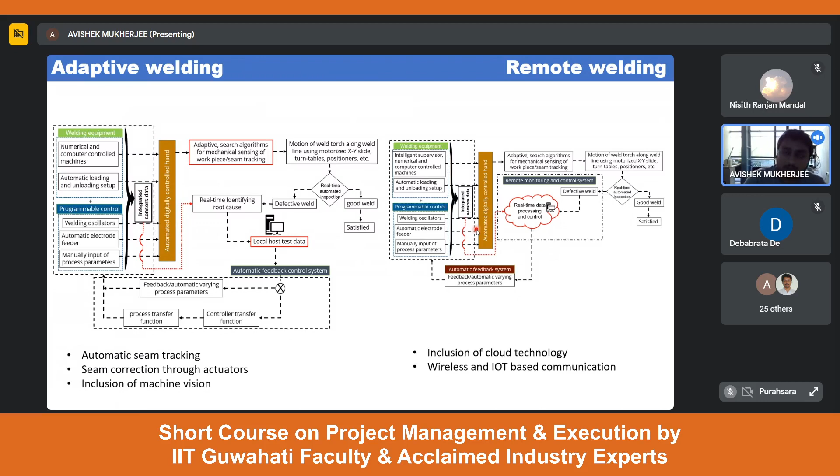So the present scenario is that robotic welding, AI, cloud, IoT, all these things are hybridized. In the present scenario we can do real time monitoring, like during welding we can do in situ correction of the process parameters to achieve a good weld. Zero defect weld basically is our main goal. So as you can see how AI can help this, and then scrap material will be less, zero labor cost, and AI is also there to take decisions.

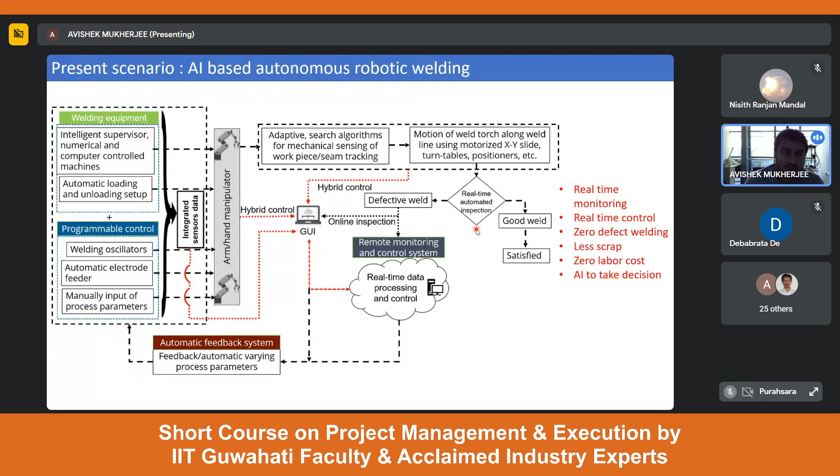So now still there are many scopes. I am mentioning some of those. As Professor Viswas has already told, quality is a prime concern of welding: porosity, lack of fusion, burn through, undercut, wormhole, blowhole. These things are coming up. These we have to minimize.

So for minimizing, nowadays RSO level 2 are checking the weld like this, and they are telling that in this position defects are there. Maybe in some organizations they are digitizing it, converting it to an image, and checking the image in a particular software. So these kinds of things they are doing, but this is time consuming. They are taking 10 to 20 minutes for a check. So AI can do and automate it.

And then weld seam tracking has already been done, but we have to see whether a robot can do it more easily and faster or not. And then collaborative welding: I have told already that collaborative robots are not mature enough to be implemented in industry right now. Some of the industries are maybe using them, so AI can be more mature in this field.

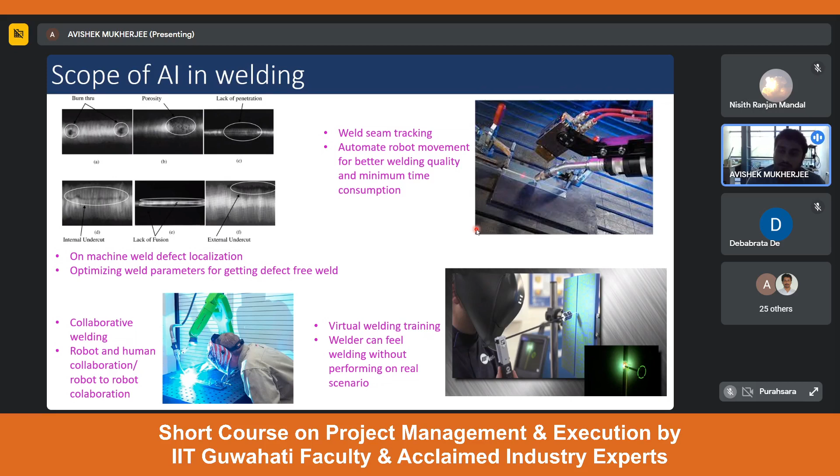And then virtual reality training with the blessing of augmented reality and virtual reality, with the integration of AI, we can now give virtual welding training so that welders can feel exactly what's needed. For training purposes, so much consumables and materials are actually lost in industries to make welders skilled. So that we can do now with AR and VR with integration of AI. So these are some scopes of AI in welding.

So now presenting our works. This work has been done by Dr. Devasis Mishra from our lab.

So the main concern of this work is real-time monitoring and control of friction stir welding. Monitoring is a factor that people have been doing for the last two decades, but people are not able to do a proper control of the process because the concern is basically the solution should be real-time deployable. If you are controlling a process, if you cannot instantly pass the data to the machine, there is no point. So it should be real-time deployable, and the model should be able to not only monitor but also control the process parameters to get an optimum quality of weld.

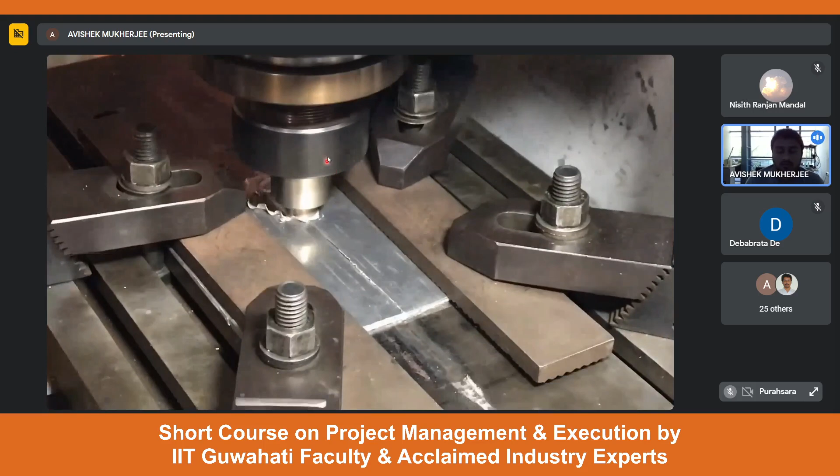So as you can see, I am showing you a video of remote welding. A student from BIT Mesra is actually controlling this FSW, and you can see from this image that initially bad parameters were given, so defects are coming up. Gradual improvement of the weld quality has happened. Now here the weld quality is very good, whereas initially it was very bad. So the model itself is controlling that in real time.

Now coming back to the... sir, am I audible? Hello? Yes, yes, yes, you are audible. You're okay, audible, very well. Okay, okay.

So the next case study is basically to detect defects - blowhole, porosities, wormhole, lack of fusion, inclusion - from weld radiographs. This has been done for Garden Reach Shipbuilders and Engineers. I was actively involved in this.

So the concern nowadays in GRSE is that small flaws can be overlooked. Lack of fusion can be so faint that even RSO level 2 inspectors cannot detect it 100% of the time. And there's a sort of lack of objectivity, intelligence, and consistency - human interpretation is there. Maybe one person measures a defect as 2.3, and another measures it as 2.4. From the standards, it's told as 2.4 or 2.5, so some reject it, some accept it. So it's also subjective.

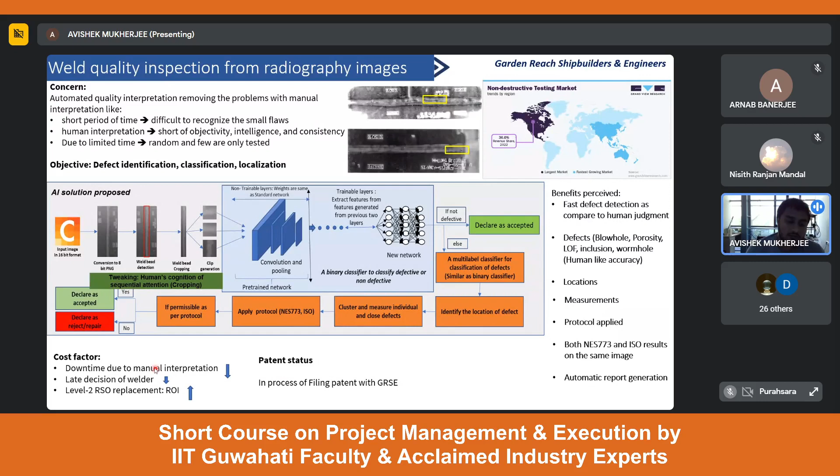So this is the software developed by COMT, IIT Kharagpur. Let me show you the working of the software.

Now another type, there are two types of NDT most popular: one is radiography and another is ultrasonic. So now we are doing the same thing for ultrasonic testing. In ultrasonic testing, previously it was image processing, but now AI is associated with signal processing.

So in UT, what we are doing basically is taking each and every row of the UT data, and we are analyzing them with AI. As you can see, these are the detected defects using AI in the UT image and section of a UT image.

And then we are measuring the height, width, and depth of the defect, also giving the location of the defect for us. So this we are doing using AI.

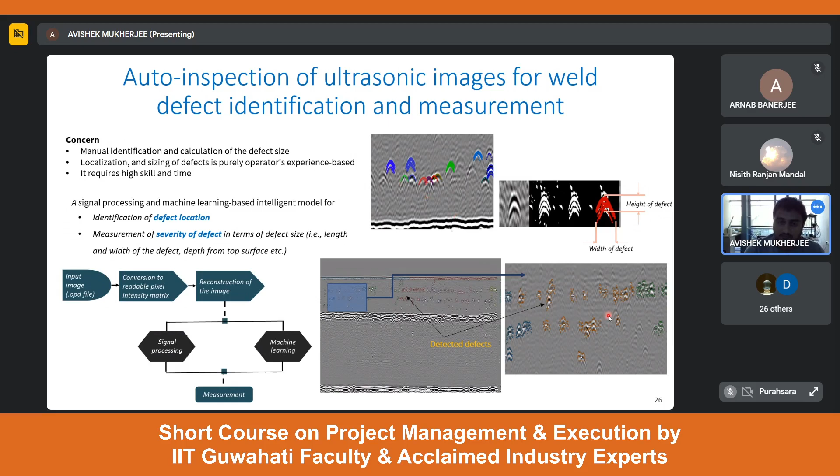As you can see, defects are detected like this, and it is also validated with L&T. Now the thing is, this is the sample.

Every solution we are giving to industry, we are making a graphical user interface or user-friendly software. So this is the thing. These are some ways one can think of to apply AI in welding. So thank you, any queries?

Thank you, Avishek, excellent presentation it was. And I am sure the participants must have gathered good knowledge out of it. Thank you, sir.